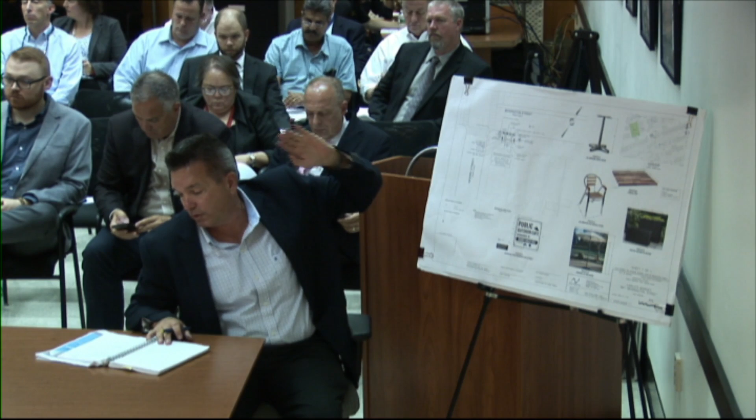I'll describe the plan to you. It consists of 6 tables with 12 seats, 2 of which are accessible, with 2 umbrellas, defined by planter boxes. The overall sidewalk width is over 20 feet, and we are still providing 12.2 feet of clearance to the building face and 10.3 feet of clearance to the overhead canopy. That's essentially it.

So this is the same layout, same configuration. It's a public outdoor cafe that's going to be maintained by Meridian Food Market. The owner got stuck on the blue line, which was currently shut down, so he wasn't able to make it. He's trying to get here.

The difference with this one is that the sidewalk cafe is across the street from the business, so it presents different challenges in terms of how it will be maintained. But it's an interesting project because there's this beautiful corner plaza there that's totally underused, and we think there's an opportunity for it to serve as a public amenity that adds to public life and also benefits the businesses around it.

This configuration consists of 4 tables with umbrellas. The sidewalk clearances are being maintained: we have 6.1 foot clearance on Meridian, 6.6 feet of clearance with one pinch point at 5 feet near the light pole, but other than that, 6.5 feet of clearance along Meridian. It's similar in nature to the application that was previously before you.

Any questions by commission members? I'd also like to note that the signs will be modified to reflect what the city is requesting.

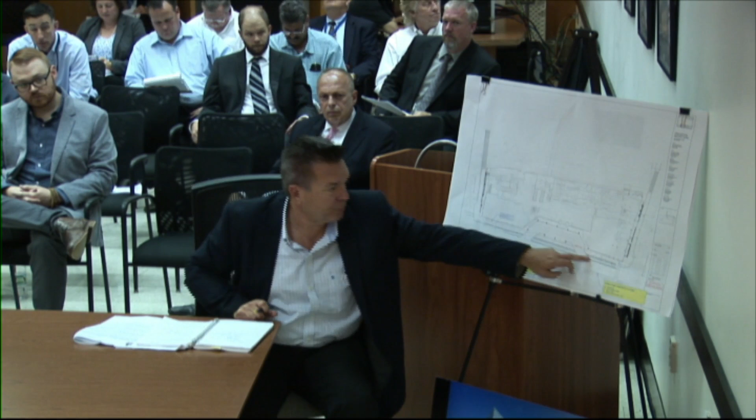I brought this presentation plan, it's just easier to read; you have the actual plans in front of you. We are providing an 8.5-foot sidewalk in front of the building, and this area becomes 12 feet where we're reserving some space, hoping for a future cafe — we'll come back and permit that when the time is appropriate. We are providing a 5-foot wide bike lane through the site, separated by curb for a majority of the way, transitioning down at the intersection. We are providing the lane width that was a bit of discussion: 2 12-foot lanes and a 10-foot turning lane, as discussed and agreed to by all parties. As far as improvements go, we have street trees, new street lights, pervious pavers, compliant with complete street guidelines as we can be while maintaining other functions.

Can I revisit the comments about support of excavation happening now? John, could you walk us through the timeline for relocation of the water main? Has that begun, when does it happen? A lot has happened since we went through the support of excavation in February, and we have an approved water line design that Mr. Sullivan signed off on. For the short term, the existing water line has been shut off at its limits and is out of service. The new water line is going to go through a corner of the building, within the building itself, and then come out into the street.

So when does the water line relocation happen — can you speak to that? I'll be honest, the contractor is working on the schedule with the site contractor at this point, and I'd like to get back to you. I don't know the exact timing of it right now, but I know they've done the cutoffs on both ends, shut off the valves — one valve was leaking and they capped that off — but I don't know the specific timing. I don't recall offhand, but we did provide John a timeline. I'll dig that out and forward it to you.

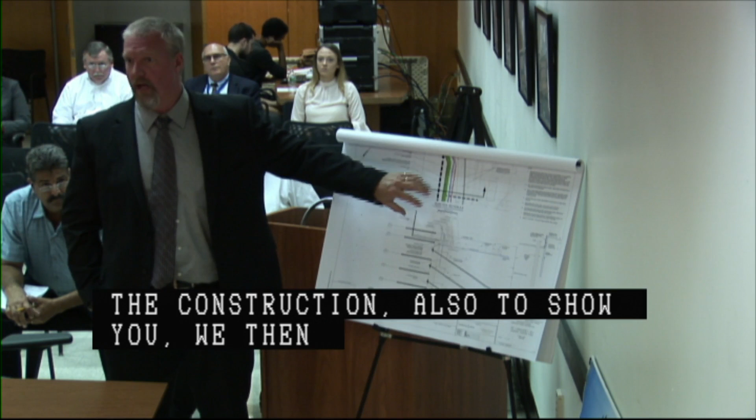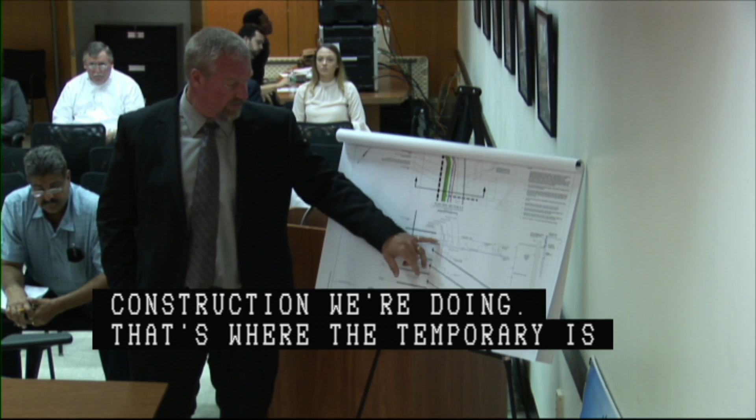On the second sheet, there will be first pre-trenching for the slurry wall installation. That removes any obstructions and lets us observe where potential utilities are. We will then install the piles for the soldier pile and lagging, install the slurry wall. After the slurry wall is installed, the top of it is down 7 or 8 feet below grade because of the type of construction we're doing. That's what the temporary soldier pile and lagging is for, to excavate and construct the cap beam. Once that's constructed, this area will be backfilled. We'll cut the soldier pile and lagging off 6 feet below grade, and this area will be backfilled.

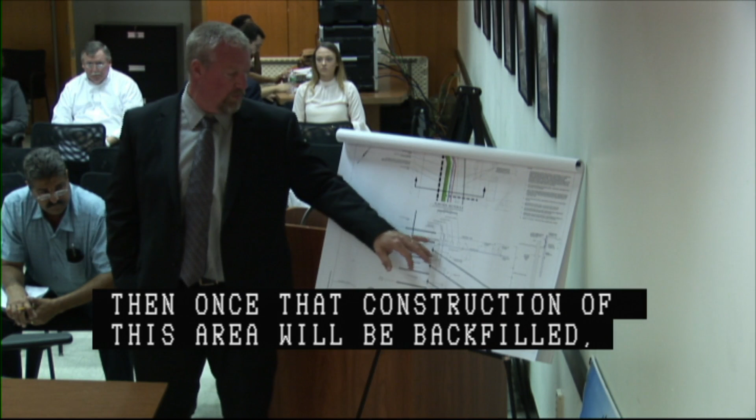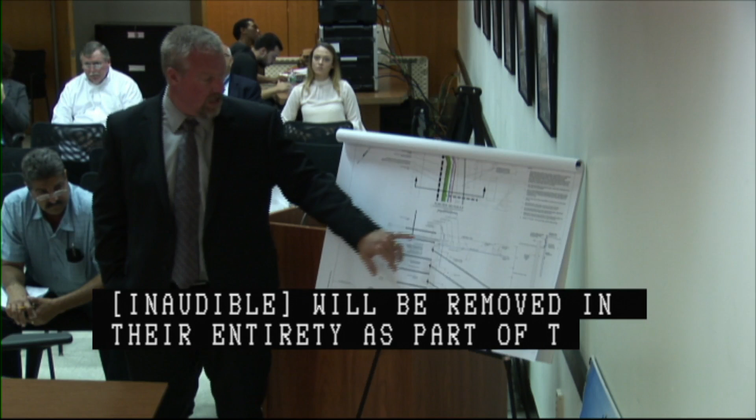There also will be, during construction of the slurry wall, 2 temporary guide walls for the construction of the slurry wall. They're about 4 feet deep from existing grade. They'll be removed in entirety as part of the excavation to get down to the top of the slurry wall. So that's the overall of the SOE. Again, the only thing that's new is the soldier pile and lagging portion of it.

I have a lot to say. So...

The nature of the tiebacks and most of the support of excavation hasn't changed since October of 17. In October of 17, I gave the requirements for pre and post inspection CCTV of gravity mains and vibration monitoring. Where do we stand on the pre-inspection? Pre-inspection will be done next week, so we'll send that to you when it's complete.

I want to make perfectly clear that if you start digging in the ground before you've submitted the tapes and had BWSC review, and we get back to you with a comment letter, if you start construction before all of that happens, you will be on the hook for any defects found in any of those sewers or drains. Is that clear? You must get the information to us and hear back from us before you start construction. We've had since October of last year to do this, and it's happening next week. This will be a continued theme of mine for any project in this city that is digging down. Everyone will hear this from me.

We continue to find concrete and slurry in our sewers. We just found a sewer segment on Harrison Avenue in front of Quinzani's Bakery that is completely full of slurry. So I am very serious about the matter.

Thank you. This project has started construction, but this is the demolition phase, correct? You haven't been doing any digging outside of that? The garage is currently being demoed, yes. So my comments are related to excavation below grade and support of excavation. It's the tiebacks that do the damage.

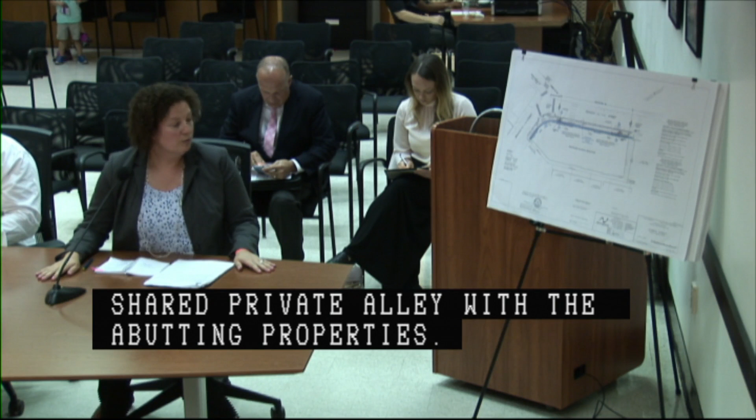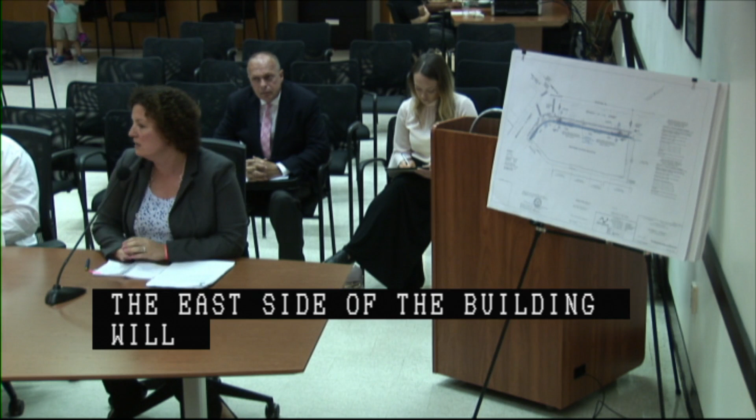The existing building has approximately 450 students. The proposed building does not intend to significantly increase student membership, but it will better serve their needs. The east side of the building will have a brand-new auditorium that can be used by students and then closed off for after-school and weekend events for non-students to attend. The rest of the building will provide better lab space as well as spaces for the students.

So in order to fit this building on the weirdly shaped site, we're proposing to do a couple underground vertical discontinuances as well as a highway discontinuance with the parcel. The existing building, first floor, basically abuts the property line.

Looking at record plans, we noticed that the existing building footings were located over the property line. So part of our highway discontinuance request is to clean up the old footings, which at this point may remain in place, as well as allow for us to put in new footings for the building so that the building can be located as close to the property line as possible.

The other thing that will be located within the highway discontinuance is at the main entrance on the west side, located right here. In order to get up to the building elevation, we're proposing a couple of stairs, and we're calling it a ramp, but it really will be less than 5% walkway for students and staff to get into the building. So we've encapsulated that area, basically the surface grade improvements required to get into the building within this highway easement.

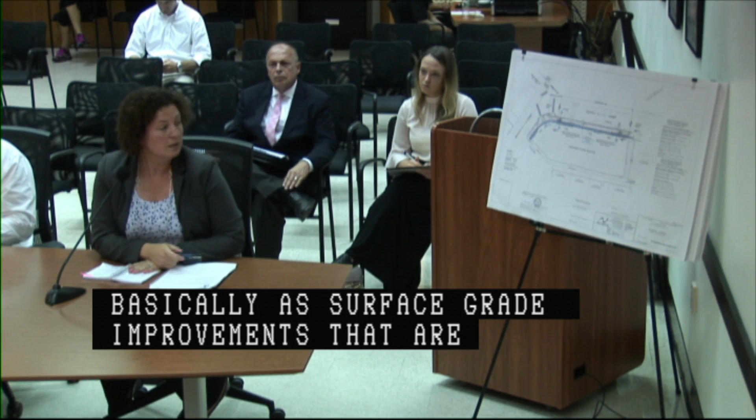The other thing that's located within the highway discontinuance area are some above-grade discontinuances that include the second story and above of the building, the spaces that will occupy that. So we discussed with staff the fact that we had these three basically vertical locations of discontinuance area that we needed, and it was advised that capturing this all in one highway discontinuance would make the most sense for this site to clean it up.

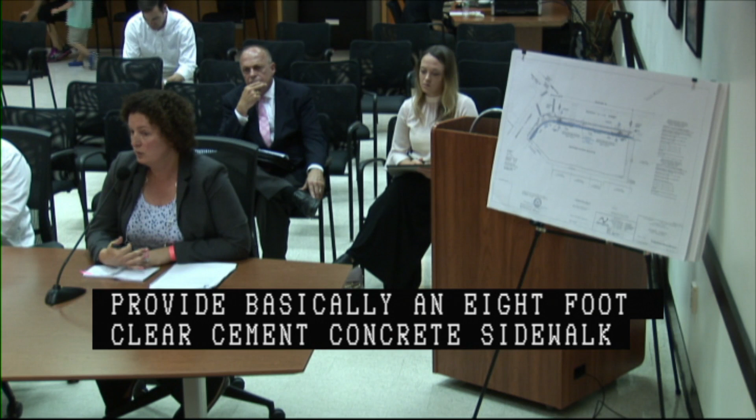Even with that encapsulation, the other thing we needed to keep in mind was allowing enough width for the public way walk on the sidewalk, and I'll talk through our proposed improvements for that on the next plan. In order to provide basically an 8-foot clear cement concrete sidewalk, we kept the highway discontinuance as tight to the building as possible, which left us with two areas of vertical discontinuance needed for the second story and above of the building of occupiable space.

A couple of questions. It is possible that some of our older schools in our city may not have ADA compatible ramps to enter the school. Will this school be reconstructed so that it is fully ADA compatible, so that a student in a wheelchair can access through the main door into the building? Yes, the building will be fully accessible. Thank you so much.

Second question: you are asking for surface discontinuances on Ipswich Street. Today what width are the sidewalks, and by the time you are through with the sidewalk discontinuance, minus any utility strips you may have, what is the remaining effective sidewalk width at the worst pinch point? Our proposed cement concrete sidewalk is 8 feet wide. We also have a 4-foot wide landscaped and paver strip. In addition to the clear 8 feet? In addition to the clear. So the minimum clear is 12 feet wide.

First of all, I congratulate you guys on the project. When I first saw this plan, I got very excited. I think this is a strip of roadway that is going to benefit greatly from this project. I thank you for including additional bike facilities. As I've lamented before, there are inadequate bike facilities on this portion behind Fenway Park. So those are wonderful additions.

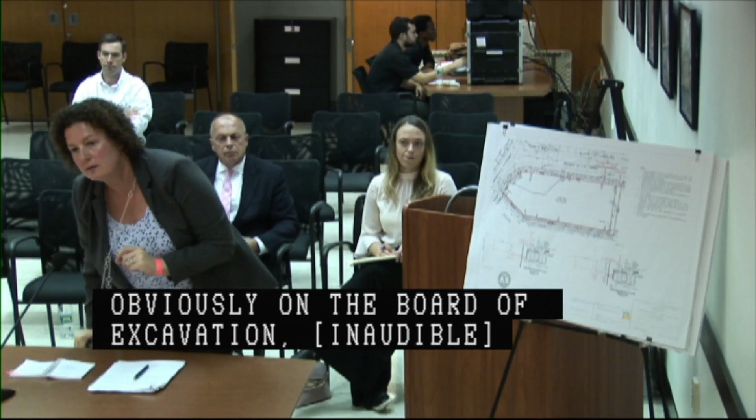I have questions on the support of excavation. Could you walk me through the depth of the piles that you'll be driving? I'm embarrassed to say, I don't know that number off the top of my head. There's an existing basement for a portion of the building, so the soldier piles will need to go down deeper than that, and I'm not sure of the exact excavation depth.

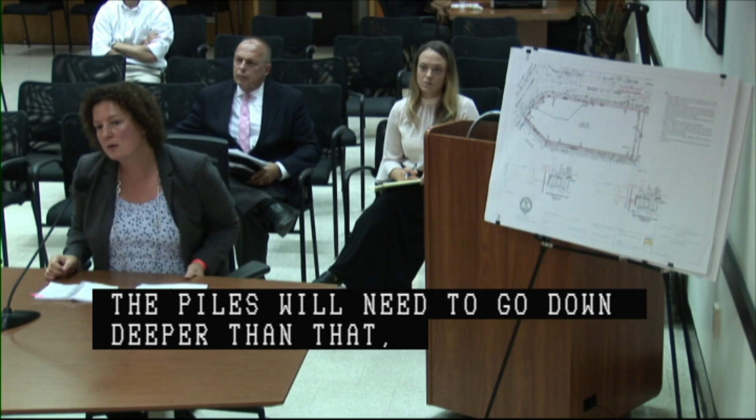Tiebacks? There are no tiebacks, it's just a soldier pile wall for vertical support, and the lagging will happen inside. So before the public hearing, can you coordinate with me on what those depths are and what the requirements will be? Absolutely.

It looks to me like there is a 20-inch gas main that is closer to the project area than our water main. The water main's on the other side of the street, but we do have what appears to be an old 30 by 36, probably combined sewer. So let's coordinate on what those requirements are going to be to make sure that sewer gets protected from any vibration. Yeah, absolutely. And then we'll formalize in the public hearing what the plan of action will be. Thank you, appreciate it, thank you.

I think as we get into the discussion of the specific repairs, speaking about the gas main, you'll notice there's a 6-inch gas main running under the sidewalk. We're bumping out the sidewalk curb, and our proposed trees will be over that gas main. National Grid has already coordinated with us that they're going to replace that line and get it out of our way as part of the general improvements they're doing in the area. Can you walk us through the specific repairs? Absolutely.

So getting back to a bigger picture discussion about the roadway, the existing Ipswich Street right-of-way is 80 feet wide. Right now the paved curb to curb is about 54 feet wide of pavement. There's a parking lane on each side with intermittent parking.

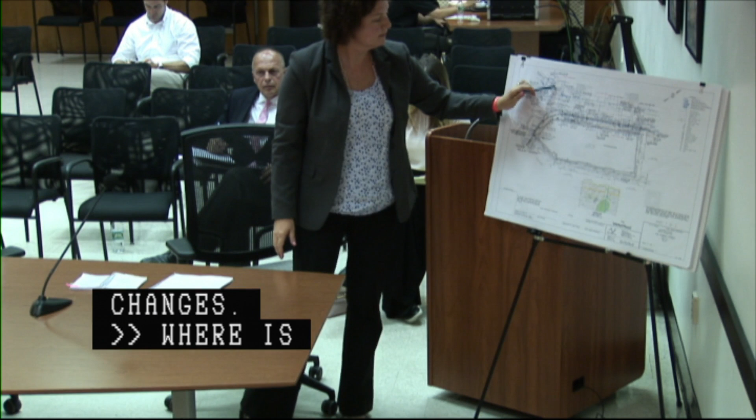Where's the bump out? Yeah, where's that bump out? The new bump out? Right here. Oh, that's not reflected on this plan. Oh, sorry, if you have the specific repairs plan, that's the... Oh, this is the discontinuance one. Yeah.

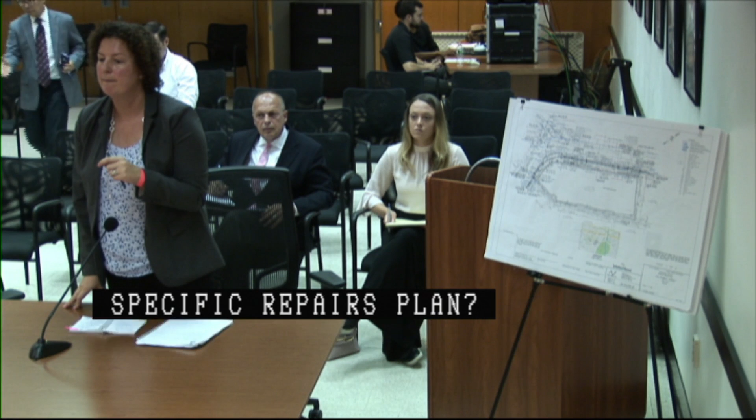Deborah, yes - again, I cannot underscore the importance of the two divisions within the two departments agreeing on these curb modifications. Absolutely. Okay.

Yep, understood. Just to add to that, you made mention of the drop-off pickup. Yes, there's also a Boston Public School Transportation Coordinator that looks at that with a member of my team to determine what the needs are for the school. Has that taken place? Yes, it has. It has? Yes. Perfect. So Peter Crossan, Julio Chow, have reviewed it and are good with it. That's good to hear.

Yes, especially because this is a city effort - it just helps to have the right people in a room. Because there is some additional real estate on the roadway here, but when we pinch it down, the fact that there's the Fenway ballpark, it all needs to make sense so that all of us are changing in a complementary manner. Absolutely.

Is there going to be on-site parking in the new building? There's no on-site parking in the new building. And the headmaster knows that, correct? Yes. And where do the teachers park?

Currently, most of them are either taking public transportation or... for the people who don't take public transportation, there are several different parking lots in the area that they negotiate with. They have reduced rates, and they usually have to avoid Fenway days.

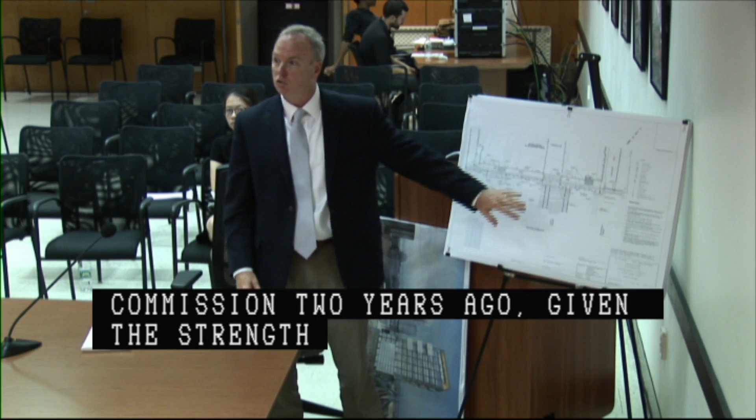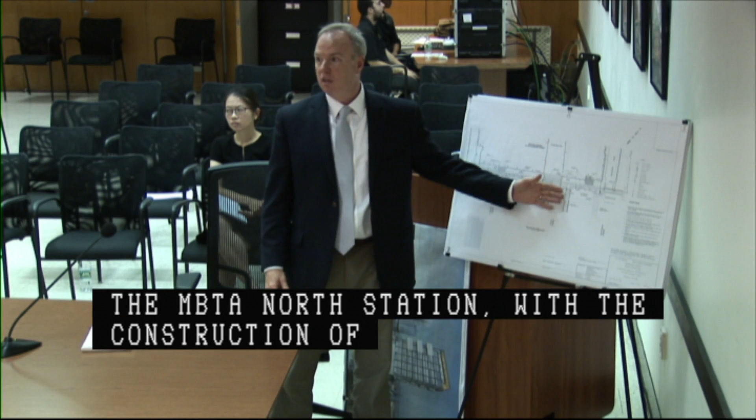As was coordinated with Connect Historic Boston and presented to the Public Improvement Commission 2 years ago, given the strength of the pedestrian volume and the importance of connecting Canal directly into the MBTA North Station, with the construction of Champions Row, the city and the proponents worked out together a concept that would more visibly identify the importance of that crossing through enhanced pavement markings.

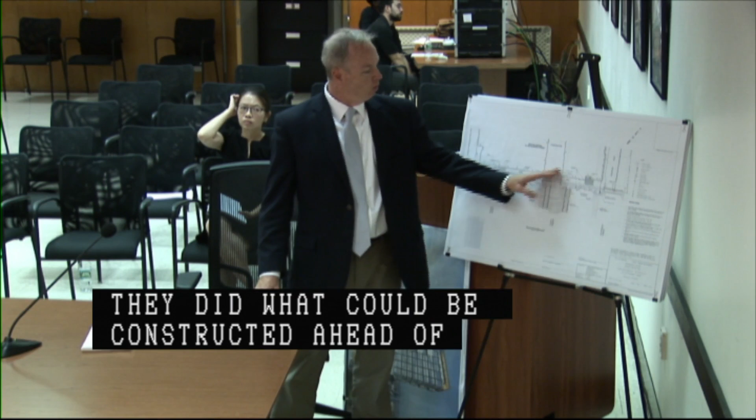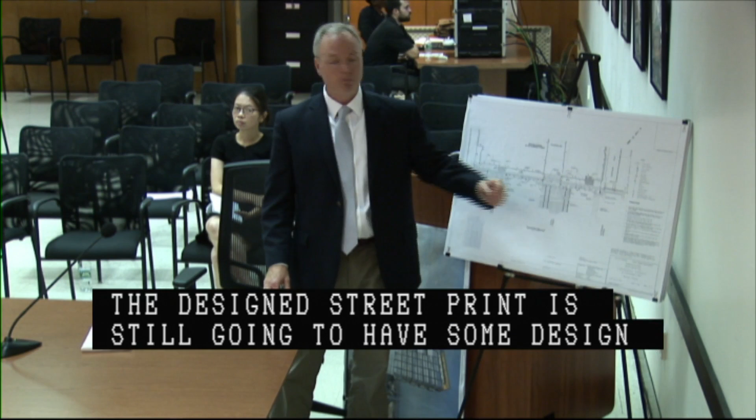As the city constructed their portions of the project, they did what could be built ahead of any improvements on the north side. So when the proponent comes back, there'll be a street print. That design is still going to have some design review, but in theory the specialty pavements have already been considered—the street printing, the thermoplastic imprinting, has been approved previously. That will create highlighted visibility of the strength of that crossing to both drivers and pedestrians.

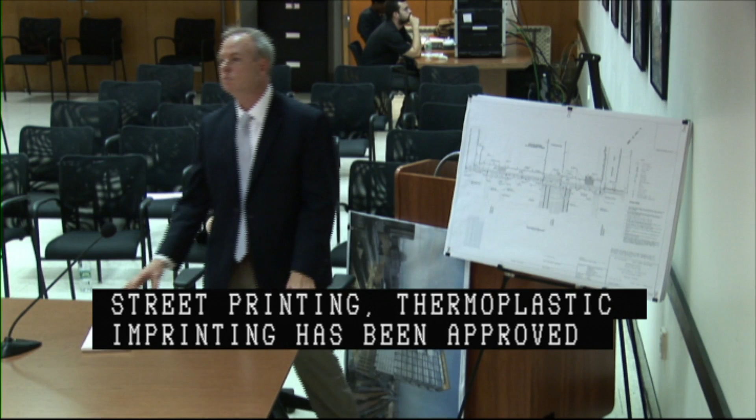And who is the entity that's going to install that print? This project will install that. And it's not a raised crossing, correct—not raised? No. And hopefully it's all pedestrian-friendly, meaning only pedestrians get to go, rather than coming through like cattle.

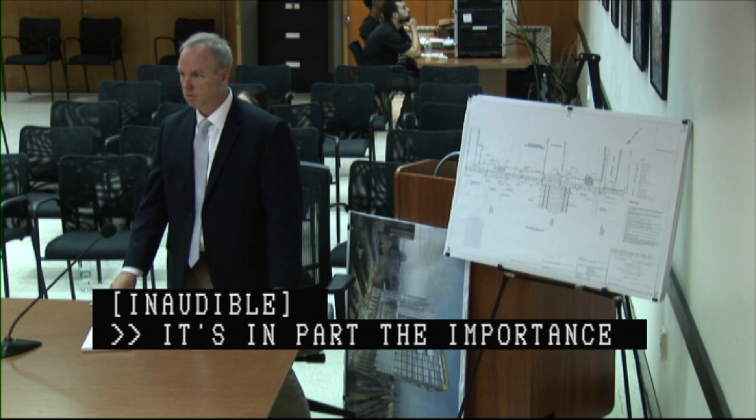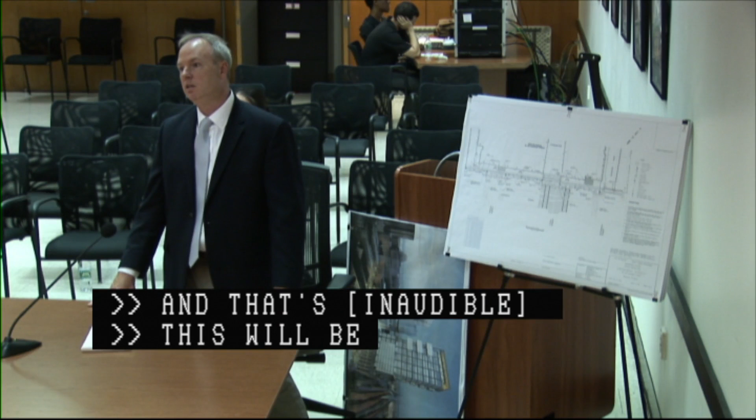It's in part the importance of that crossing that we have re-examined the bollard space to provide safety there. That's signalized, with pedestrian push buttons, connected to the signal system to the east, tied into Legends. There's a mast arm and signal equipment there to control the canal, which will be a right-out only movement.

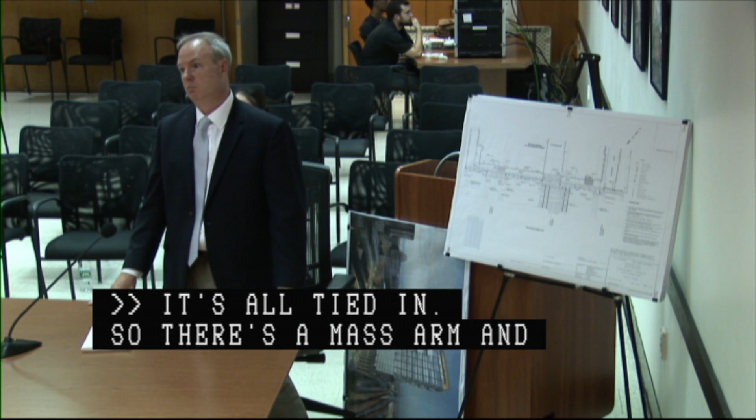Throughout the city, sometimes the location of the pedestrian walk light may not be the most sensible place from a pedestrian perspective. There are too many examples which I don't want to get into here. So again, take a look at it from the placement of the walk light, otherwise you're just going to have funnels of people.

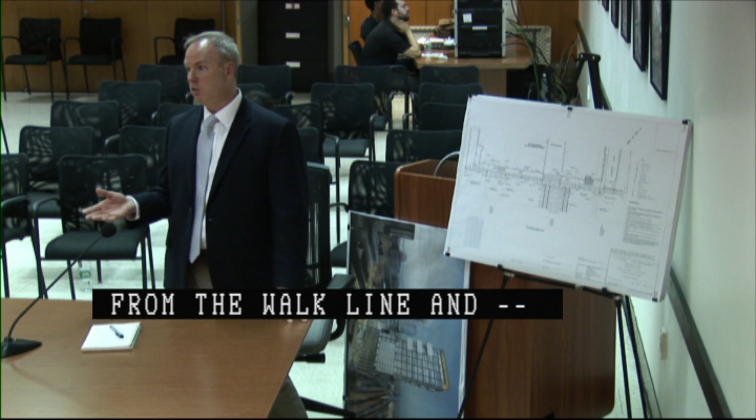That was well developed two years ago, and those dialogues have continued as recently as discussing how the Connect Historic Boston work will be finished, working with Public Works and BTD.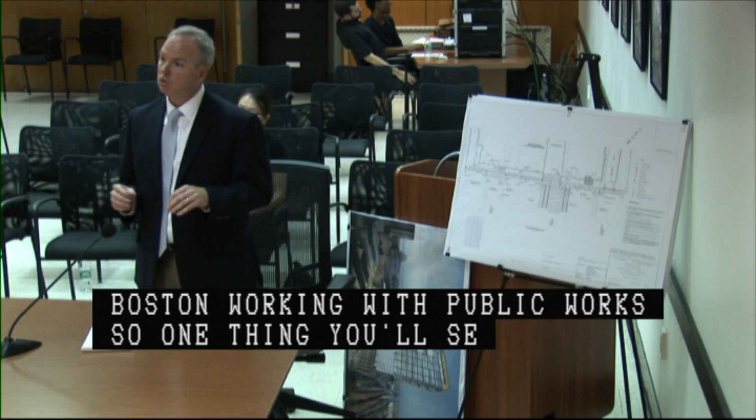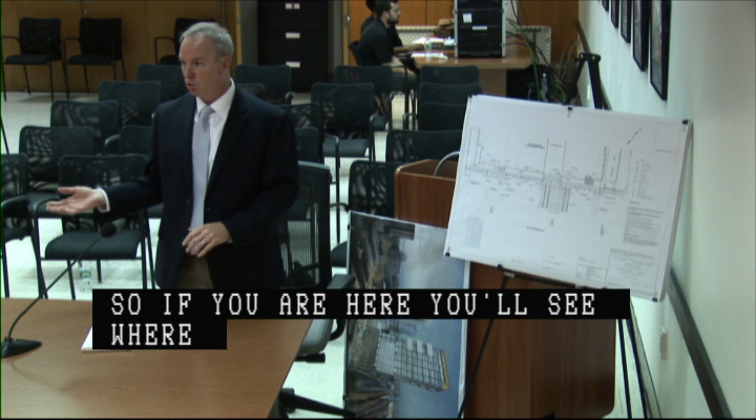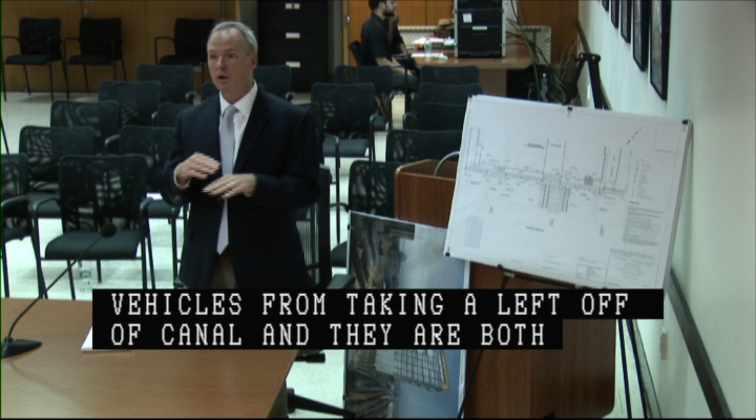One thing you'll see in the middle of that street print are some mountable traffic islands that delineate the cycle track. In certain areas you'll see where there's no street print - those were required by the Connect Historic Boston project to prevent vehicles from taking a left off of Canal. They are sloped granite, mountable for emergency services, and those are the white areas you're seeing without any street print.

When does this all take place? Share that goal - what's the schedule for this pedestrian crossing? That's this fall. Exciting - hockey season starts in October. Exactly, we're well aware. Our partners in particular are focused on opening day.

I just had some conversations recently with the team relative to some large numbers coming in, specifically escalators, and how to get them on site. They have to back in on Causeway. I asked them to talk to Katie about protection of the bike track facility, so make sure they follow through with that. Did you talk to the JMA team or the Boston Properties team? JMA.